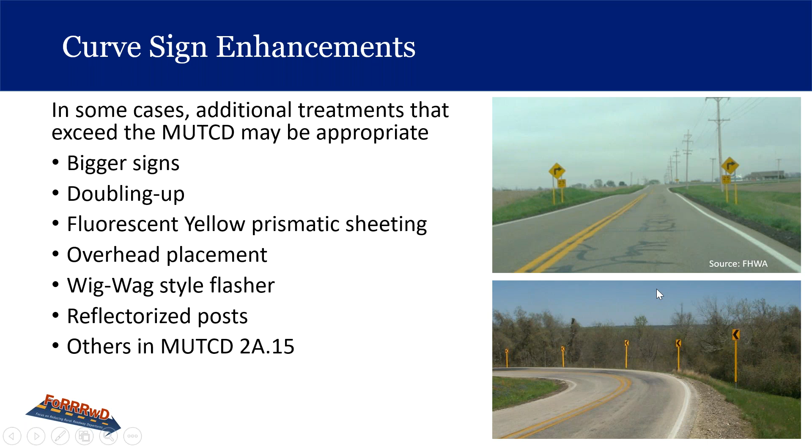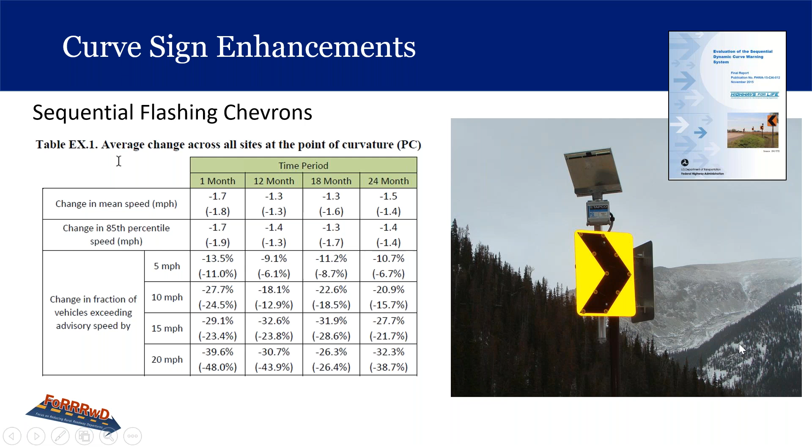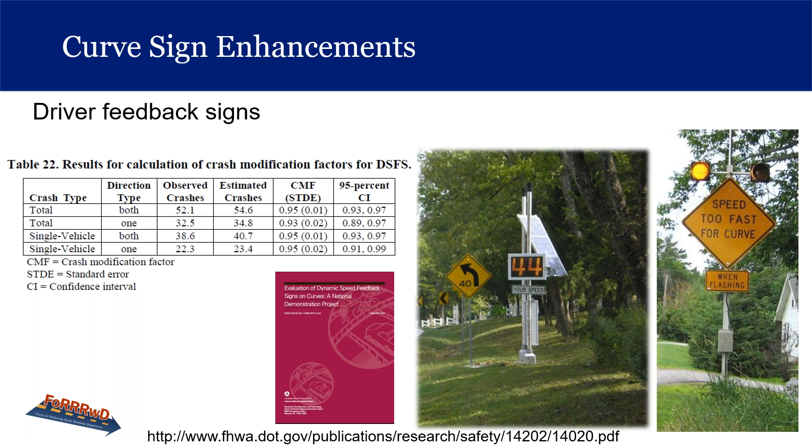Our traffic control devices should show the same color day or night. Retroreflectivity is the property of the device to reflect light from the headlamps back to the driver at night, usually using beads or prisms to reflect the light and color.

So there are some minimum retroreflectivity requirements that agencies are required to have a method in place to evaluate their signs' retroreflectivities. One is a visual nighttime inspection method, and there are 3 approved procedures for signs. These are all nighttime inspection procedures.

Then there's the measurement method. This could be done any time of day. They have a retroreflectometer that you can use to do that. We're actually getting some retroreflectometers here at the Ohio LTAP Center, and we'll be able to loan those out to different agencies, so you can request to borrow those very soon.

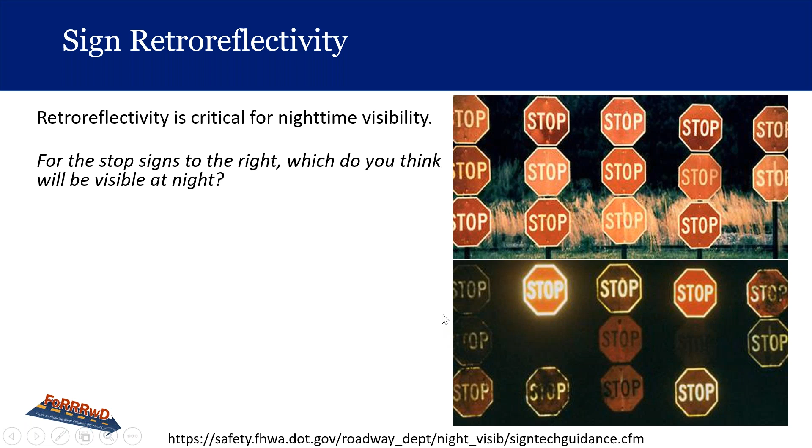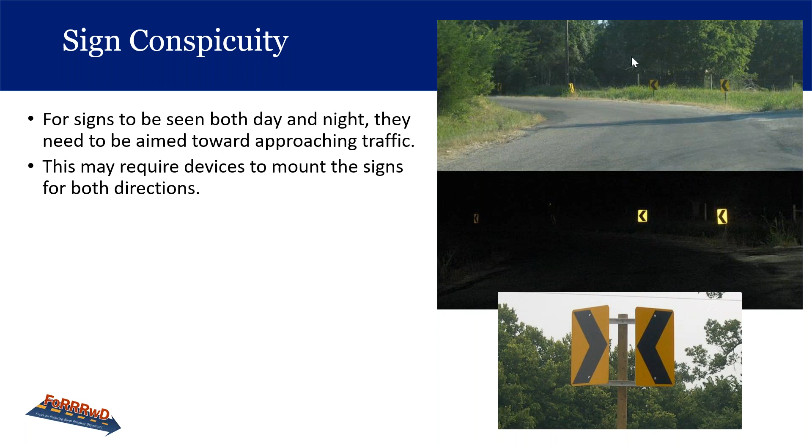In addition, vegetation and other obstructions to the signs should be removed. So this is definitely the time of year for agencies to be out there taking part in their vegetation management program. I know every April here at Ohio LTAP, we have a vegetation management conference, and it allows the workers from local agencies to get their certifications in different chemical spraying and things like that to help with their vegetation management.

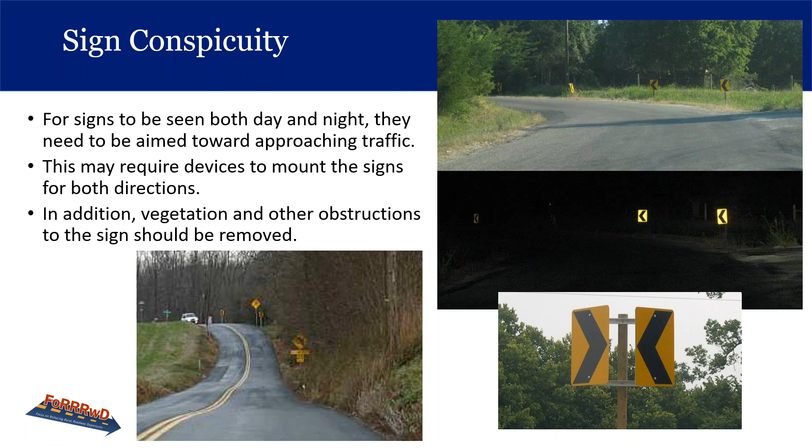But yeah, we definitely don't want to have vegetation growing over the signs. And so this is the time of year that we need to be out there taking care of that. So that was what we have to talk about there about signs.

And then our next countermeasure that we want to discuss is pavement markings. A lot of this information you'll find in part 3 of the OMUTCD. We'll also talk about not just what's in there, but some other things that go above and beyond what's in part 3 of the manual. So the different crash types addressed by pavement markings are curve crashes, head-on collisions, and nighttime crashes. The different pavement markings might include edgeline and centerline markings, delineators, or raised pavement markers.

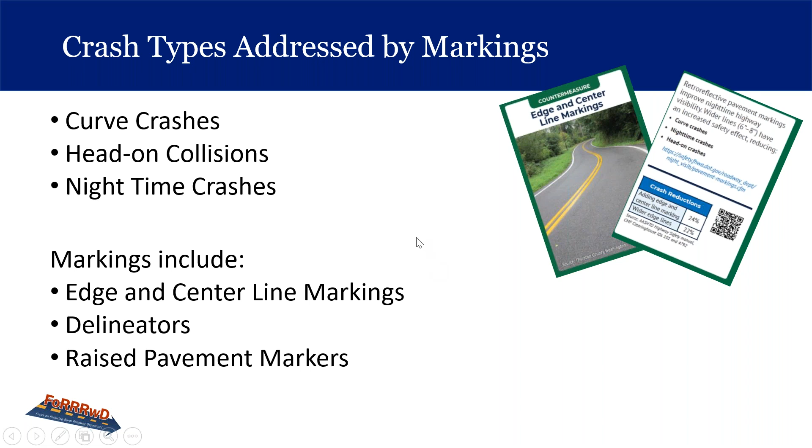So let's first talk about our centerlines and edge lines. The MUTCD talks about different requirements and recommendations for centerline markings. It states that centerlines should be placed on all rural arterials and collectors with a traveled way greater than or equal to 18 feet wide and an ADT of greater than or equal to 3,000 vehicles per day. So that's the should condition.

And then for edge line markings, the MUTCD says that these shall be placed on rural arterials with a traveled way greater than or equal to 20 feet wide and an ADT greater than or equal to 6,000 vehicles per day. The markings should be placed on rural arterials with a traveled way greater than or equal to 20 feet wide and an ADT greater than or equal to 3,000 vehicles per day. So there's a difference between standards and guidance — that's the shall and the should conditions.

As you can see in the picture, it really does make a difference to the motorists as they approach a curve and drive through a curve. They can picture and estimate how they need to drive through that curve from a distance, and then when they get to the curve, the pavement markings provide them guidance from beginning of curvature to end of curvature, all the way through the curve.

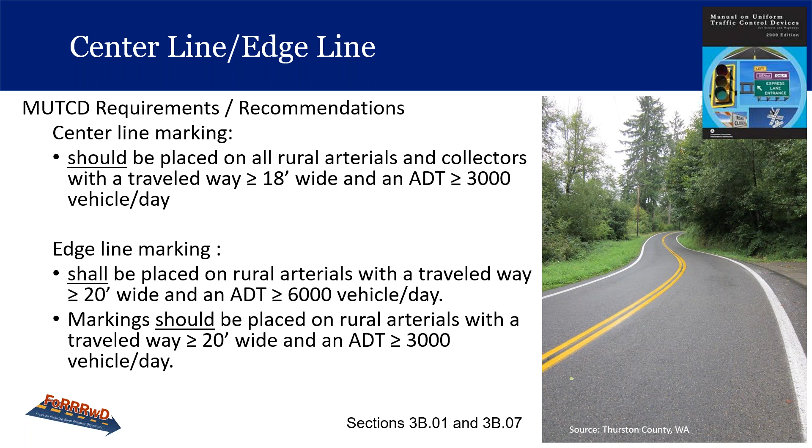So like I said, we're talking about low cost treatments. Pavement markings definitely fit the bill for that.

I've noticed even the road that I grew up on all my life down in Pike County never saw pavement markings until this past year. Maybe it was the gas tax or whatever, but the Pike County engineer finally decided to put pavement markings on that road. So I can't wait to see any crash data from before and after with that, because it's definitely a curvy road.

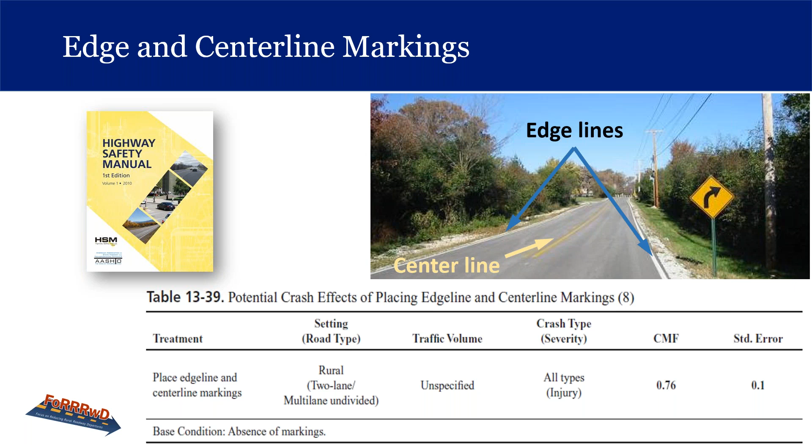Out in Missouri, they did an edge line case study, and a little background on it. Prior to 2008, Missouri DOT did not stripe edge lines on roads with less than 1,000 vehicles per day. They had approximately 18,000 centerline miles of road with an ADT of less than 1,000 vehicles per day. Of these, approximately 7,500 centerline miles, 1/3 of the mileage, had an ADT between 400 to 1,000. These roads had 219 fatalities and over 1,500 severe injuries in a 3-year period, and represented 2/3 of all the overall crashes in that state.

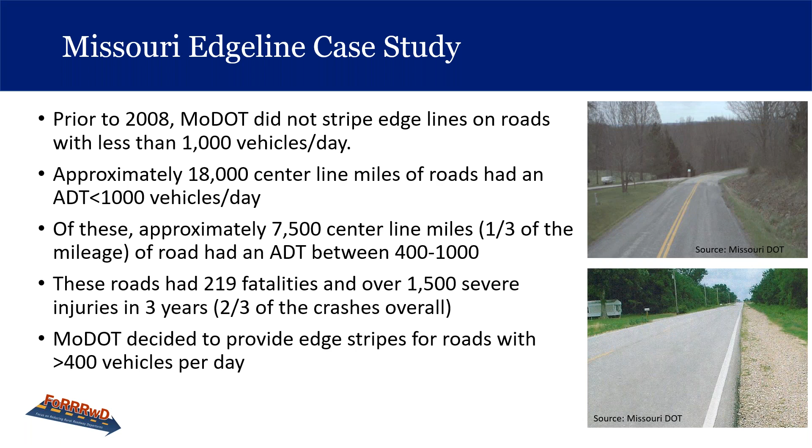Missouri DOT decided to provide edge lines for roads with greater than 400 vehicles per day to see if they could put a dent in the number of these crashes. They went through the entire study process with the Bayes method and all that stuff. They observed crashes in the before period from various counties, and observed crashes after the period, and had a percent change for effectiveness.

Another thing they did with edge lines is they enhanced them by making them wider than normal. The normal edge line is 4 inches wide. What if we made it wider by 2 inches? So they made it 6 inches wide and studied this countermeasure.

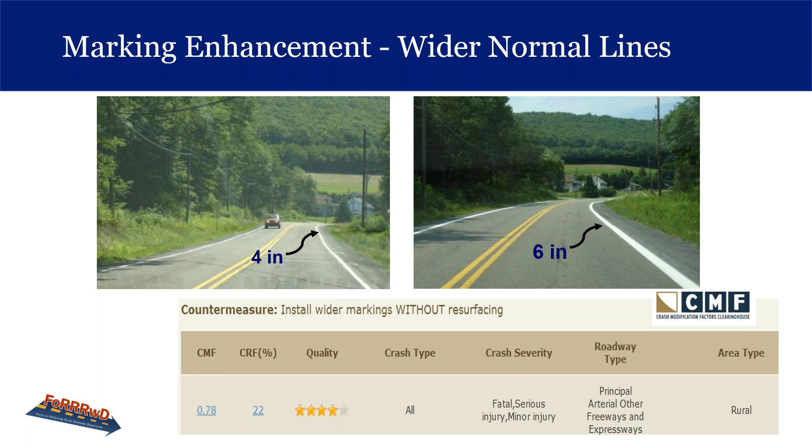Another pavement marking enhancement we have is raised pavement markers. It seems like we don't see much of these anymore because everyone says that the snow plows rip them out of the pavement. But let's see what we have here.

It says raised pavement markers may supplement or substitute for edge lines and/or center lines, reflective or non-reflective. They developed a recessed pavement marker to address the snow plow problem, so you can recess them. It says they had a maintenance thing on there, let's see what it said about the maintenance.

Some agencies use non-reflective for lane lines, the button variations shown in the photo. The button type down at the bottom are likely non-reflective due to the shape, they're circular. The raised pavement markers are historically difficult to maintain.

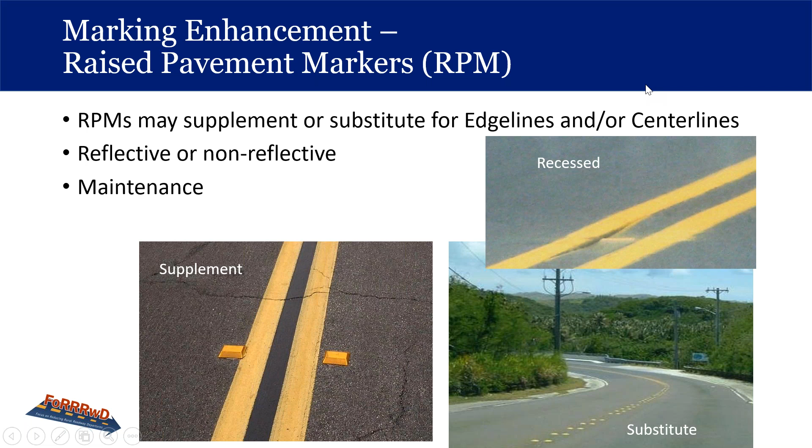So we've learned a lot of lessons with raised pavement markers, but we do know their benefit for helping to guide motorists along the roadway. One of the things they've looked at is the recessed pavement markers to address the problem with the snowplows knocking them out of the road and knocking them loose, and how they could fly up and damage cars. Hopefully the recessed pavement markers will be more successful, so we can use them more often.

Okay, our next countermeasure is delineators. Delineators provide guidance at night and during adverse weather, and they remain visible when the roadway is wet or snow covered. Here we have some post-mounted delineators, and then you can see another product type here on the right. It looks like a circular post with a bigger target, more retroreflectivity. The entire post lights up on the right.

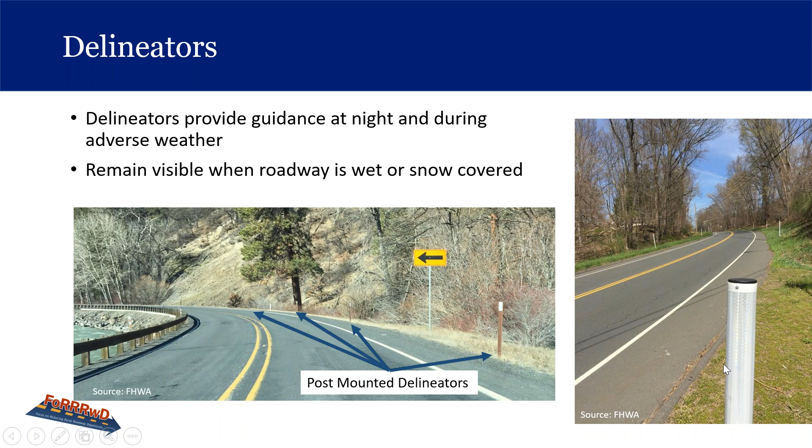These may be appropriate where table 2C-5, which we went over last week, indicates that chevrons are either recommended or optional. For all other roadways, delineators may be appropriate based on risk or crash history. You can see MUTCD 3F.02 to .04.

Here's a page from the MUTCD showing an example of delineator placement, for color, size, height, and offset. So if you ever wondered why you see delineators along the side of the road versus chevrons, it would be from this part of the MUTCD section, part 3, where you would find this material.

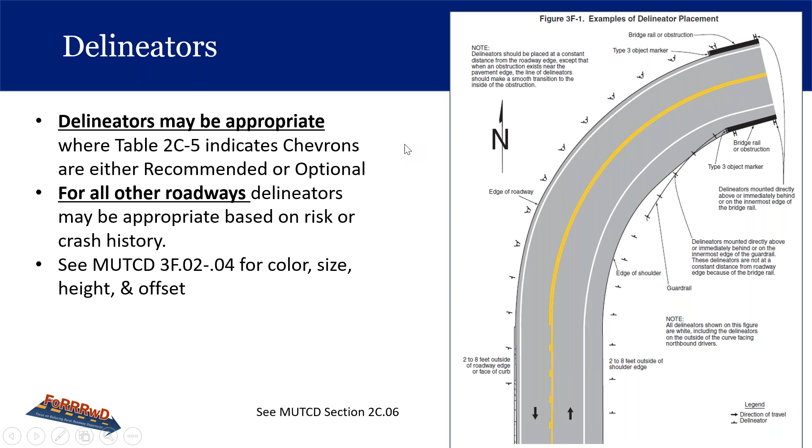And then we have guardrail delineators. The MUTCD allows mounting of these delineators on guardrail, even though it is less than 4 feet above the edge of pavement and may be a greater distance from the roadway. The MUTCD allows delineators to be placed as an option directly on the face or top of a barrier, even though height and offset may not match installation guidance. As a note, the butterfly type delineators mounted inside the guardrail are not advised for installation under a post bolt head, as it may adversely affect the performance of the guardrail.

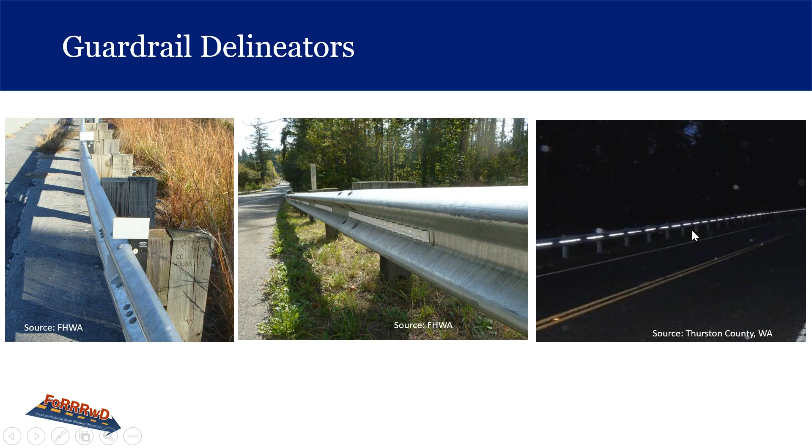Another thing to talk about is marking retroreflectivity. In the MUTCD, section 3A.02, it states it's a standard that markings that must be visible at night shall be retroreflective unless ambient illumination assures that the markings are adequately visible. All markings on interstate highways shall be retroreflective. It then goes on to say that maintaining minimum pavement marking retroreflectivity is reserved for a future text, as the FHWA is having a rulemaking on it.

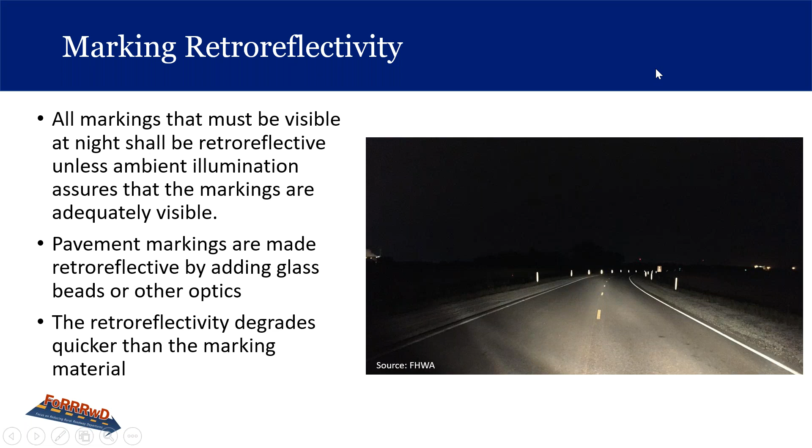There's actually a website, safety.fhwa.dot.gov, where you go to the roadway department, night visibility, pavement markings, for more information. Pavement markings are made retroreflective by adding glass beads or other optics. The retroreflectivity degrades quicker than the marking material, so there's definitely some maintenance involved, but it does provide good guidance at nighttime. It's an important feature to have with our pavement markings.

Another type of pavement marking is where we have words on the pavement. As you can see in the picture, they actually wrote the word 'curve,' and at the bottom you see the advisory speed put on the pavement as well. The goal of this type of marking is to reduce speeds in horizontal curves. They have different methods, showing good examples of what to do, and then showing what not to do, and what they prefer instead.

The source of this information is NCHRP Report 600, Human Factors Guidelines for Road Systems. You can just Google that and download the report. It's a free report.

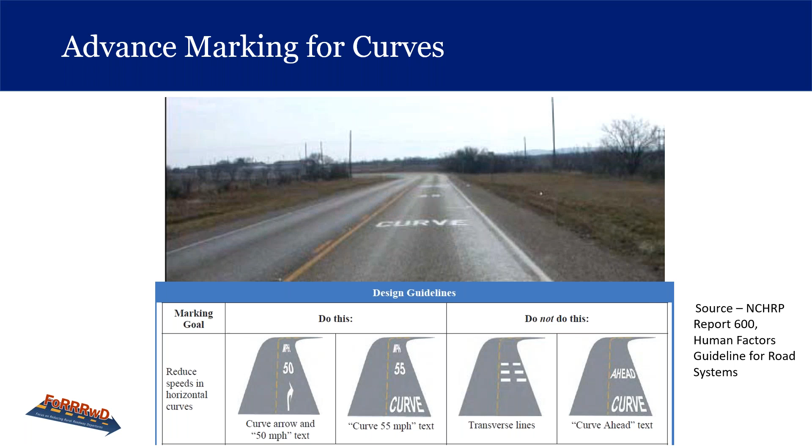Some other products we have for pavement markings, and we've actually used this quite a bit here in Ohio, are speed reduction markings. These give drivers the illusion that they're traveling faster than they really are. It involves tick marks along the inside and outside edge of the lane throughout the curve, spaced differently. As shown in the bottom picture, the spacing of these tick marks gets closer together as they approach the beginning of curvature. The theory is if the motorist feels like they're going too fast, they'll slow down.

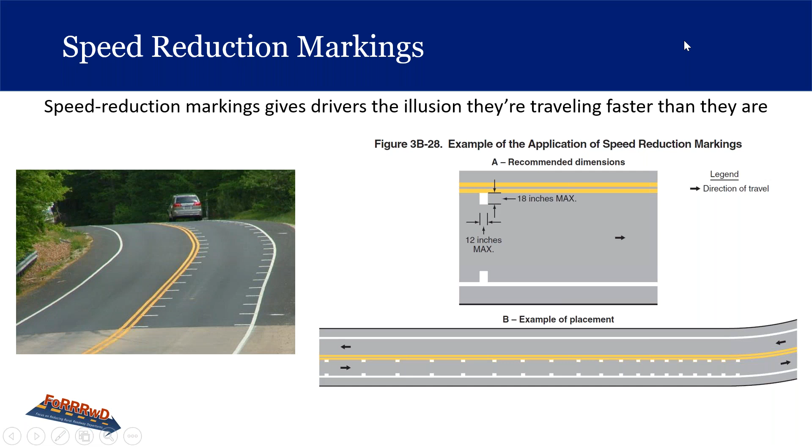Here are some good resources that the FHWA has on their website: the enhanced delineation for horizontal curves website, and also the low-cost treatments for horizontal curve safety, which came out in 2016. I recommend both of these websites and the information in them. You can download this booklet and look at it for free.

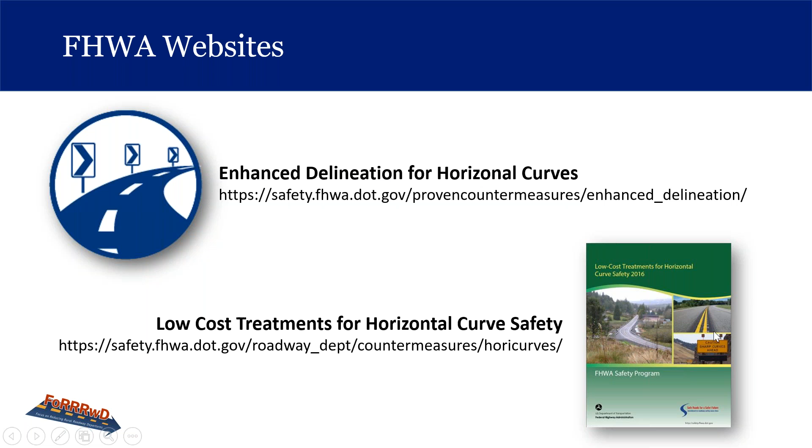Okay, so let's see if we achieved our learning outcomes for signing and pavement markings here. Let's see if you can answer these — you can write them in the chat box. It says identify signing and marking countermeasures to reduce roadway departures. Which countermeasures did we discuss to reduce roadway departures that involved signing and marking?

You can help me out here, Paula. Sorry, I'm here. Okay, there are... I asked it.

It's only one response: reflective signing and striping. Give him a few more seconds here. Okay, there's the chat box. There you go, Ray, they're coming in now.

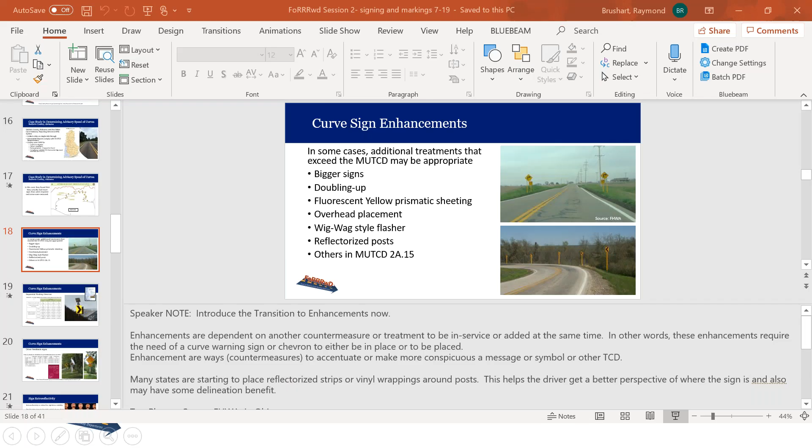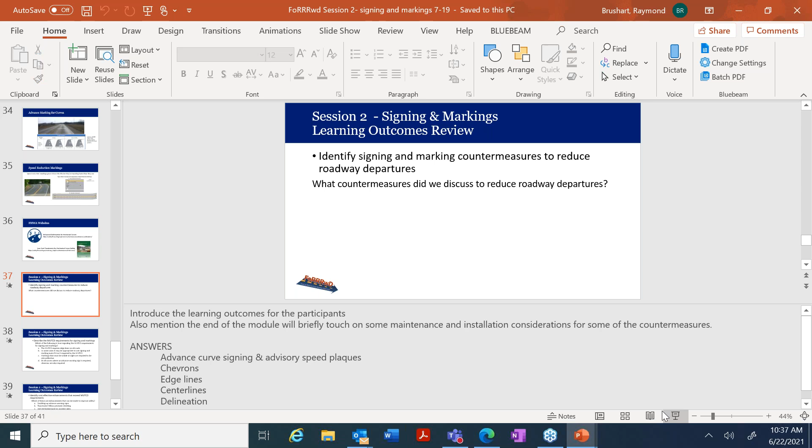All right, very good. Let me bring this back up here. Okay, so very good answers. We definitely went over advance curve signing and advisory speed plaques, chevrons, edge lines, center lines, delineation, and those were good answers. I'm glad there's people out there listening to me ramble on.

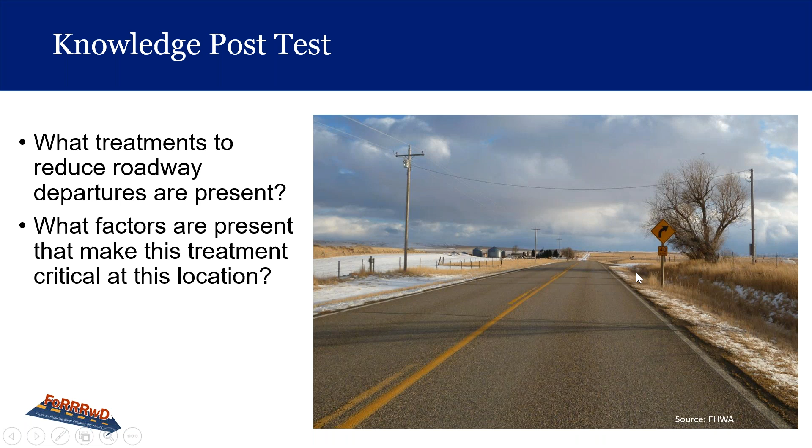Something that's not present that may - let's see, chevrons are not present. Maybe they're required, maybe they're not. So what makes the advanced warning sign particularly critical at this location? It's because the utility poles and secondary road may give the appearance that the road is going straight. That's the visual trap. A slight crest vertical curve restricts the sight distance, so you don't see the curve. So you don't even see the road going to the right. So it's pretty critical there to have that sign.

That picture was taken in Montana, by the way, not in Pike County that you may have suspected.

Okay, so any questions so far as we wrap up Module 2? Okay, Ray, I don't see any questions in the questions box. All right. Well, then I vote that we go on into Module 3. How's that?

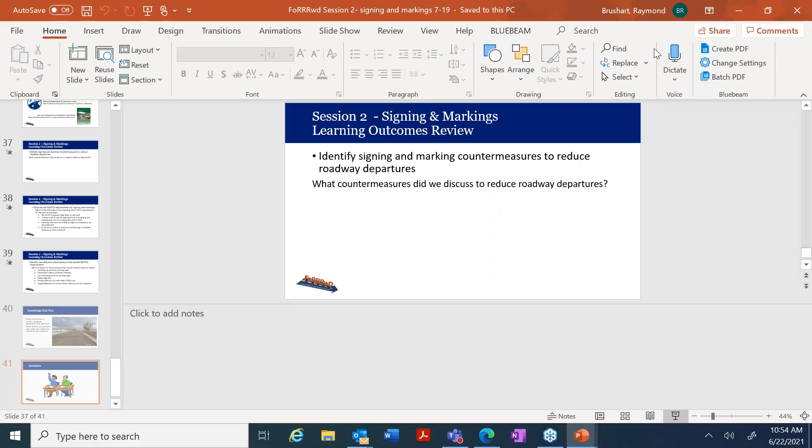All right, so in session 3, we're going to continue talking about our number one strategy of reducing roadway departures, and that is to do what we can to keep vehicles on the road. We're going to talk about pavement friction and what it can do for us.

So our learning outcome in this session on pavement friction would be to identify locations with increased friction demand and name the unique components of the high friction surface treatment, which is the HFST countermeasure, and to recognize the crash reduction potential for high friction surface treatments.

Since we learned about these, I don't know, 5, 6, or 7 years ago that I first heard about them, we've been using them quite often, and they really do have an impact on reducing crashes in locations that need more friction.

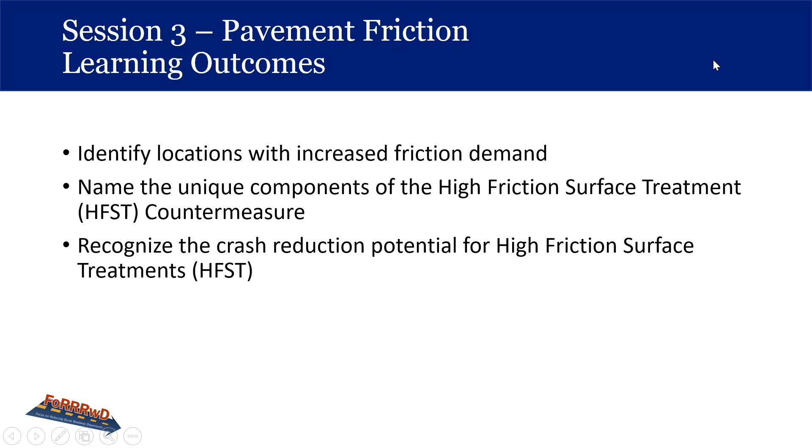With our knowledge pretest, first of all, there is a website on FHWA's roadway departure website, rspcb.safety.fhwa.dot.gov, with a lot of information about roadway friction treatments.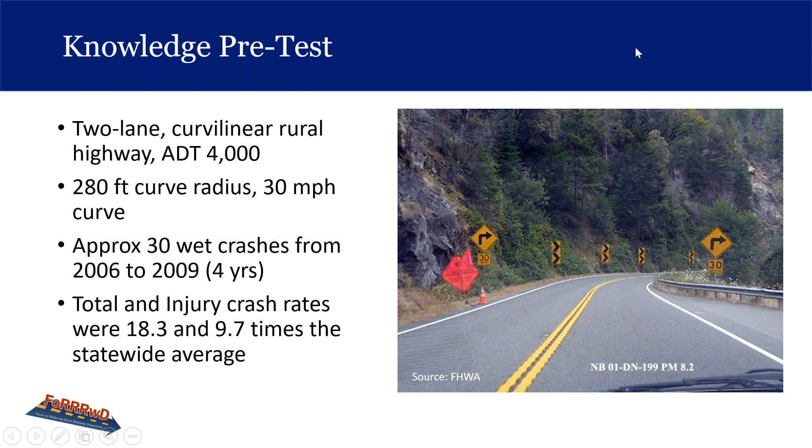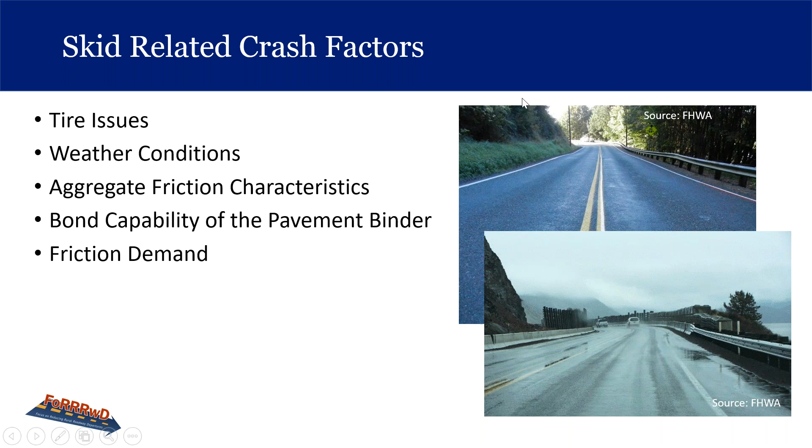Let's look at some skid-related crash factors. What causes skid-related crashes? Could be tire issues - bald tires certainly don't help. Weather conditions, so rainy, wet or icy conditions. Aggregate friction characteristics - the aggregate in the asphalt could get rounded and not provide the proper amount of friction. The bond capability of the pavement binder, so you're losing aggregate from the binder, and the roadway itself might have a high friction demand. So those are skid-related crash factors.

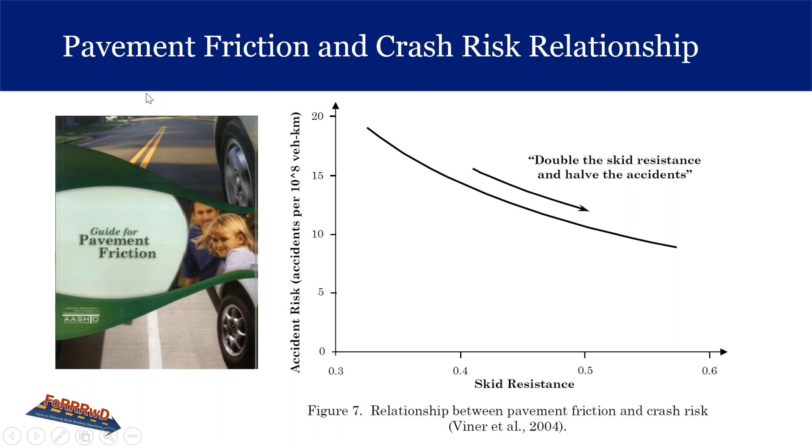Here's another resource for you to find more information from AASHTO. They have a guide for pavement friction, and this is actually a pretty costly book. But this one here that I just clicked on is free - it's a web-only document with all the same information. It's the NCHRP web-only document 108, Guide for Pavement Friction. You can just Google that and view it or download it. This web-only document 108 is the source material for the AASHTO guide for pavement friction.

On page 78 of the NCHRP guide, which is the chart I'm showing you on the right, it shows the following from the state of Maryland: sites without any geometrical constraints are categorized as low frictional demand sites, while sites with geometrical constraints such as railroad crossings, traffic lights, pedestrian crossings, roundabouts, stop and yield controlled intersections, curves, and freeway entrance/exit ramps are categorized as high frictional demand sites.

So here we have the chart showing skid resistance on the x-axis and accident risk, accidents per 10 to the 8th vehicle kilometers. The more skid resistance you have, the less risk you have. There you go, the relationship between pavement friction and crash risk.

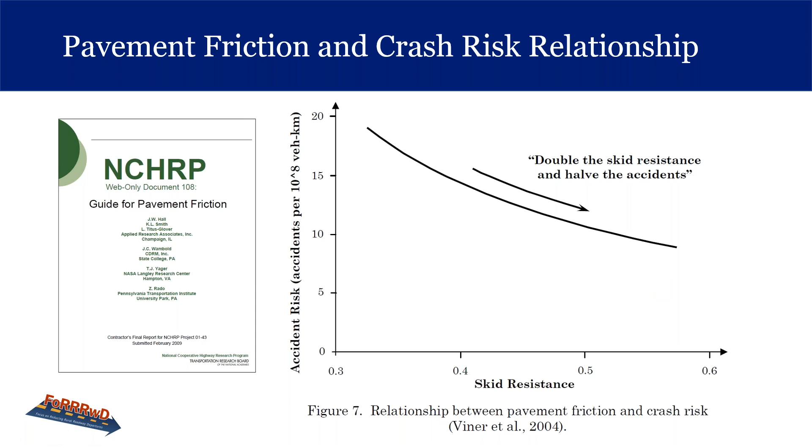If you're wondering why every time you see a nice exit ramp just got resurfaced, and then a couple weeks later ODOT came in and roughed up the pavement, it was because we came out there to do some diamond grinding and provide more friction. We discovered that when an 18-wheeler turns over on its side at these locations, almost every time it actually went into a skid first and then flipped over. So the theory is, let's prevent the skid, therefore preventing the rollover.

Okay, so... you see what I was going to say there. Okay, so let's go back to that picture here.

So friction demand is compiled by a number of variables. You've got a road with tight curves or curves on a downhill grade like the one you see here. It's a downhill grade plus there's an intersection, so that's like the double whammy, especially if people are traveling faster than they should be or not paying attention.

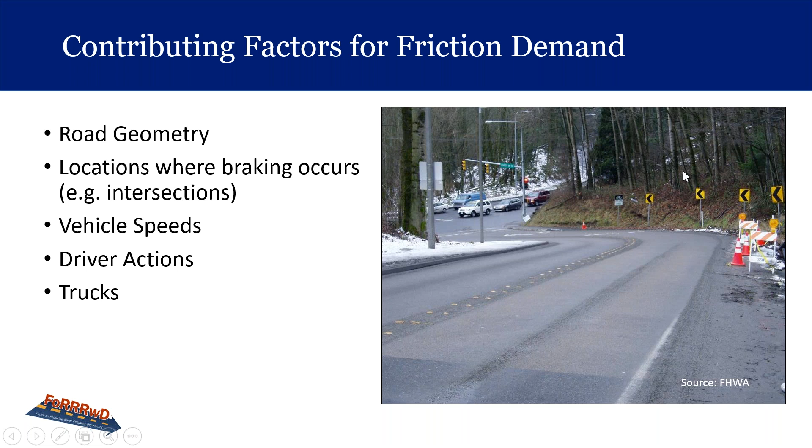Okay, so here we have the AASHTO horizontal curve design model. For all you people that love physics and math, we have a formula on the screen. The radius of the curve is equal to the design speed squared divided by 15 times the super elevation and side friction factors added up. This is from the AASHTO Green Book. I'm sure all my ODOT engineers had that one memorized.

But the key message here is to introduce the AASHTO horizontal curve design model and the different factors involved. When a vehicle moves in a circular path, like in a curve, it undergoes centripetal acceleration toward the center of curvature, although drivers feel it as a force pushing them outward. From accumulated research and experience, limiting values for super elevation and friction have been established for curve design.

There are some assumptions in this AASHTO design model: the passenger car tracks the curve as a point mass, and operates at a design speed all the way through the curve. The curve design should avoid loss of control due to skidding during cornering. The model is intended to produce operations that avoid loss of control due to skidding, which would occur if the side friction demand exceeded the friction provided by the tire and pavement surface.

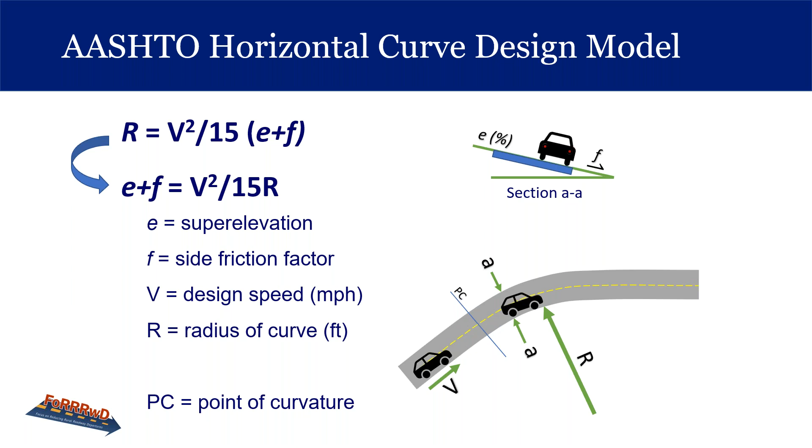And so that should explain why friction is so important. If we rearrange the formula and put super elevation and friction on the left, we can demonstrate the importance of friction, especially since there's no super elevation. All right, so that's our little background on that.

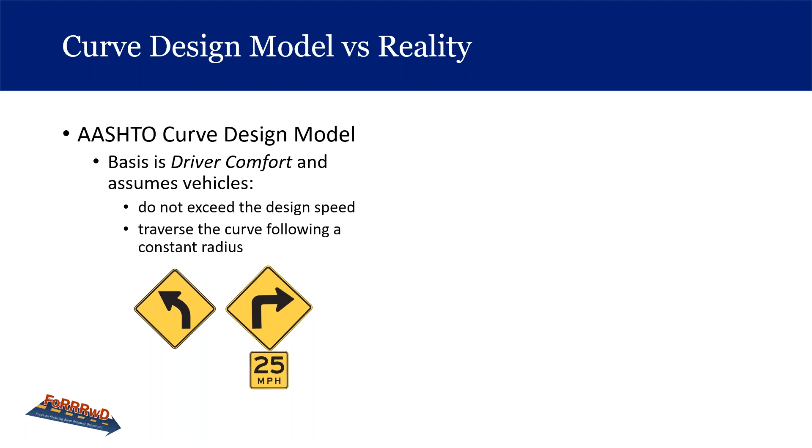And then we have our curve design model versus reality. This curve model I just showed you is based on driver comfort, and assumes vehicles do not exceed the design speed of the curve and that it traverses the curve following a constant radius. But in reality, the likelihood of skidding increases when these assumptions are violated, and several studies have shown that under real world conditions, both of these assumptions are violated.

Okay, so in the MUTCD, if you studied that a little bit, you'd see that the advisory speed may be the 85th percentile speed of free-flowing traffic. And then when we did our ball bank study that we talked about last week, the speed corresponding to a 16-degree ball bank indicator reading, or speed otherwise determined by an engineering study. So these are the speeds that we deal with when we study a curve.

A lot of times these assumptions are violated as cars drive through these curves. They're either driving too fast or they're not staying in their lane, which they're supposed to do. We also talked about last week how a big percentage of head-on crashes happen in curves. That proves that people are not staying in their lane. They're not traversing the curve following a constant radius, in other words.

So if you want more information on this, NCHRP Report 500, Volume 7, deals with a guide for reducing collisions on horizontal curves. So they even talk about friction in that booklet as well.

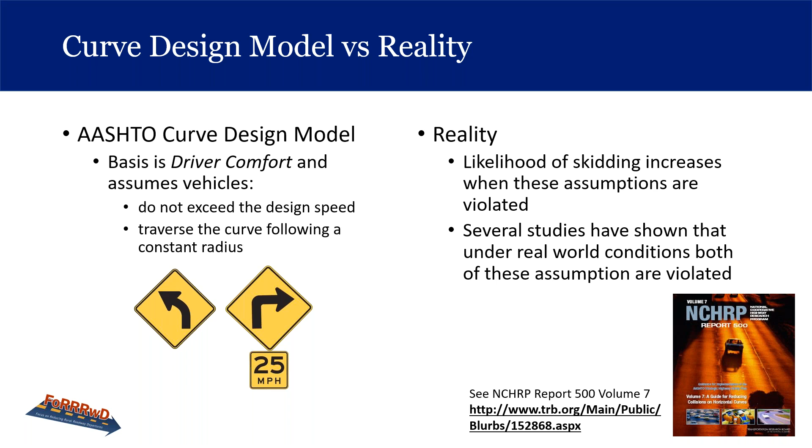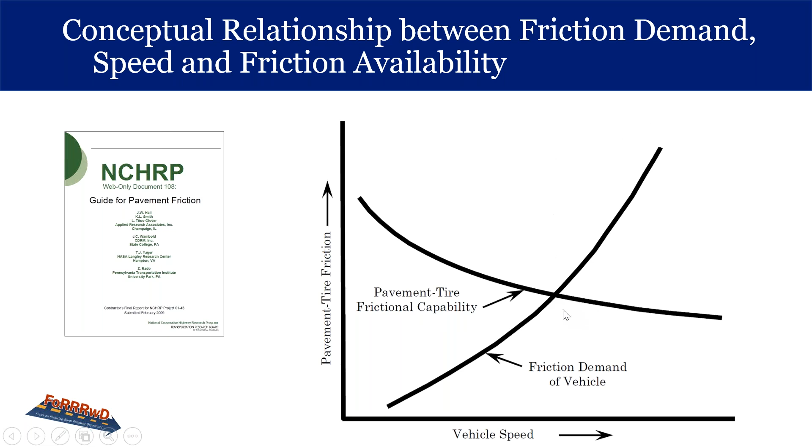Basically, it's not a good thing when your car is driving through the curve and the friction demand exceeds the pavement tire friction capability. That's the point where the skid begins. So we need to do what we can to prevent that from happening. The speed of the impending skid is at the intersection of these two lines.

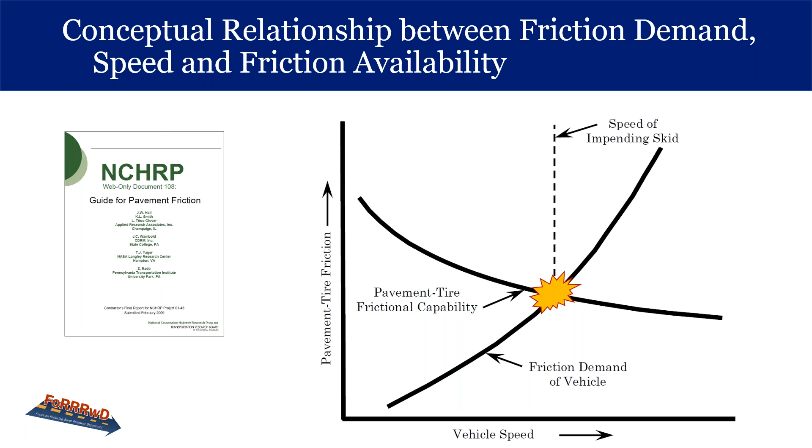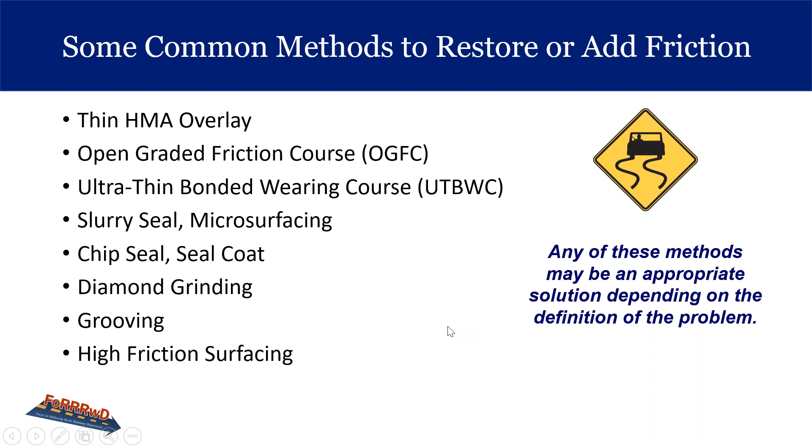So here's some common methods to restore or add friction. We have the thin hot mix asphalt overlay, or the open graded friction course, or ultra thin bonded wearing course, or a slurry seal or micro surfacing, or a chip seal and seal coat, and then the diamond grinding that you see on our interstates and interstate lookalikes, or grooving, and then high friction surfacing. These are all quite common these days, and any of these may be an appropriate solution depending on the definition of the problem. But we want to focus on our high friction surface treatment and how it's used as a critical spot improvement.

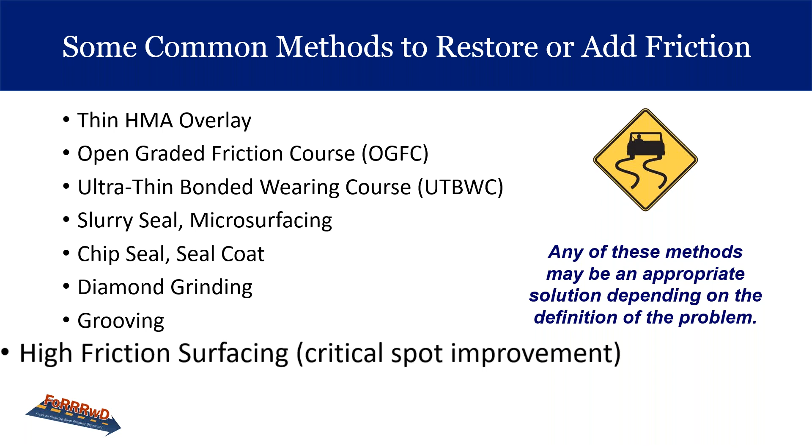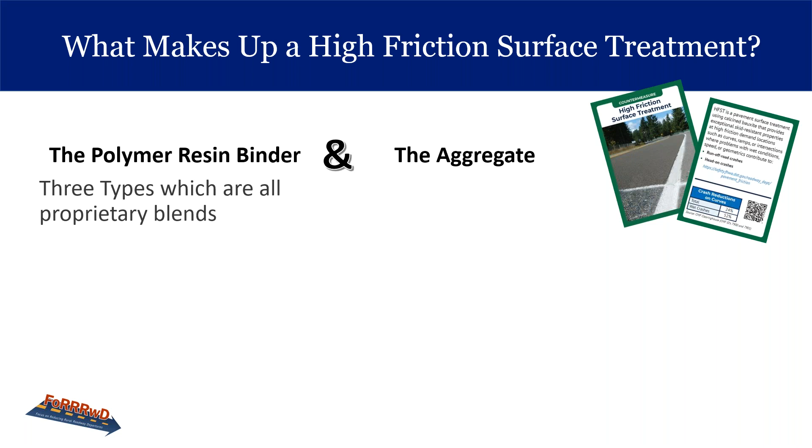So first of all, what makes up a high friction surface treatment? There's two parts to this treatment: you've got the polymer resin binder, and then the aggregate itself. There are three types of binder.

The design of the binder is evolving with many new products becoming available. The most common binder used is the epoxy resin, but many of the others work well also. You may have some drawbacks like cost or placement restrictions. The binder locks the aggregate in place and provides the needed tensile strength to transmit the vehicle load to the pavement below.

The aggregate we want to talk about today is called calcined bauxite, and that's because it provides the highest resistance to polishing and friction durability. Bauxite is available from Arkansas and is now being calcined in Alabama, so there's a local U.S. source for the aggregate rather than getting the rock from India or China. When they first came out with bauxite, it was very costly, but in the last 3 or 4 years, the cost has been coming down because we can get it locally, or in the U.S. at least now.

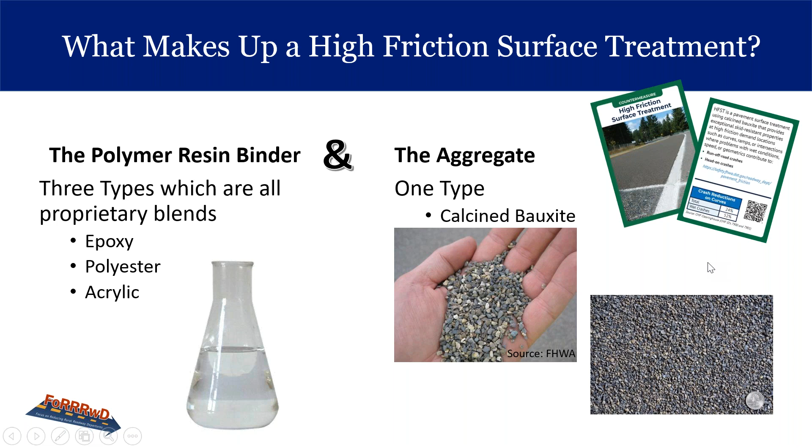So why do we use the high friction surface treatment? Well, with the bauxite, it resists polishing when compared to other aggregates, and the high quality binders improve aggregate retention. It's the combination of the bauxite resisting the polishing to become rounded, combined with the high quality binder so that the aggregate actually stays on the roadway longer.

Placement of this treatment in the curves receives the shear and tensile forces not found in tangents, which can accelerate polishing when excessive friction demand occurs. Quality polymer binders placed properly are required to retain the aggregate. Aggregate loss can result in lower friction values over time. Aggregate needs to be embedded 50% into the polymer binder for installation longevity.

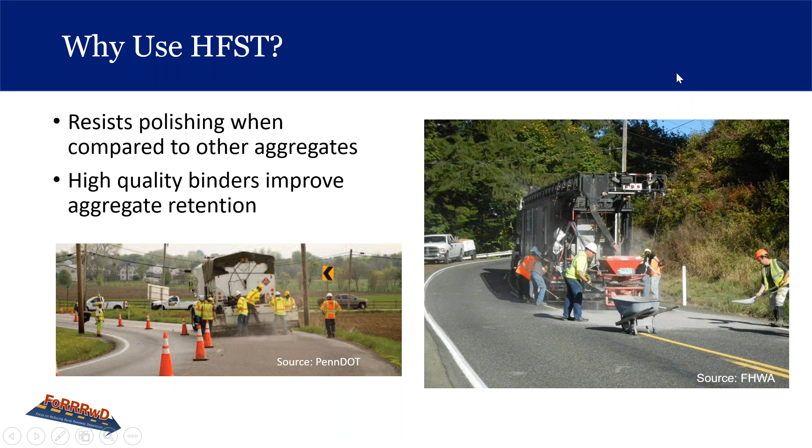Here's an example. This video shows how reductions of 25 to 30% affect the stopping distance. I don't know if you can hear this or not, but at least you can see it.

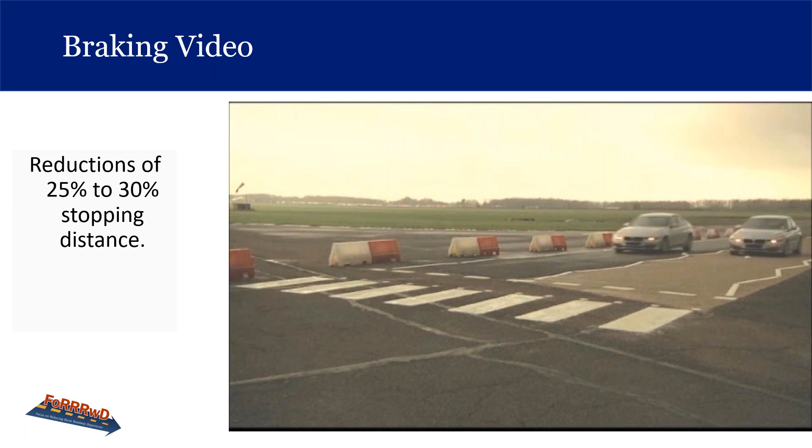Okay, so you can see that the car actually did come to a stop sooner than the non-treated lane of travel. This was done in 2013 using calcined bauxite, and on a 3-run average, the friction value on the concrete pavement was 52 before treatment. On the high friction surface treatment, the friction value was 85, and the stopping distance was between 25 to 30%, regardless of speed. You could probably talk to some people involved in crashes that wish they could have stopped 25 to 30% shorter.

So where can friction benefit safety? At high crash locations that involve wet weather related crashes, and high friction demand locations like curves or intersections — like that one picture with a curve and an intersection downhill. Or poor pavements, which have marginal friction caused by the weather, or places that have friction values not compatible with approach speeds and geometrics.

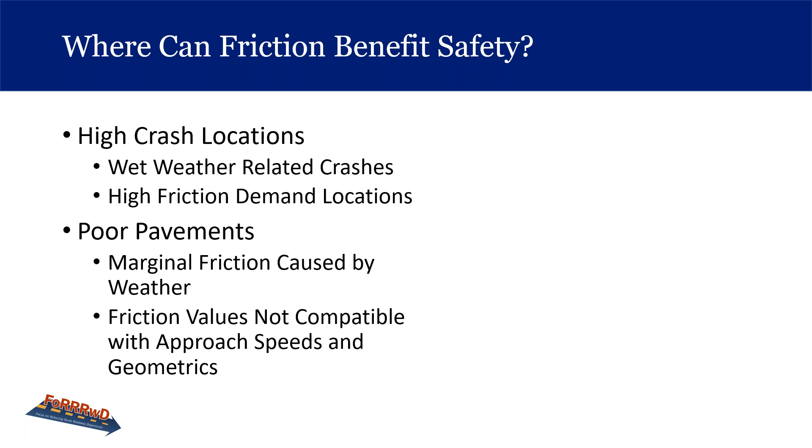So horizontal curves, when we talk about road geometry, that's definitely a place where we would get a lot of safety benefit from this high friction surface treatment.

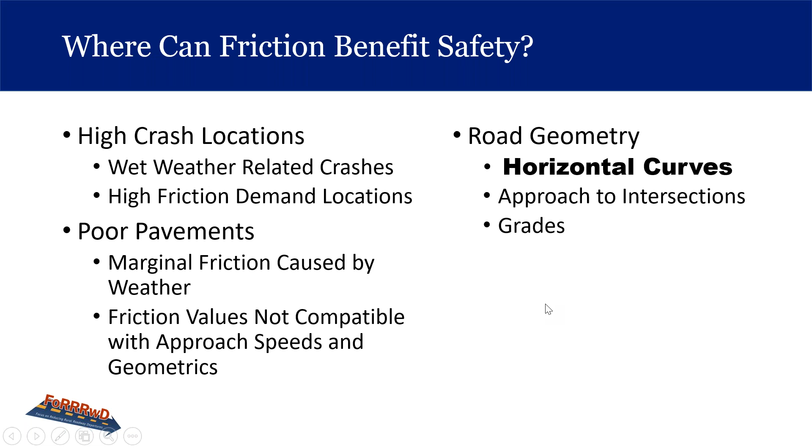They've studied this treatment and come up with recommended distances ahead of the point of curvature to begin the high friction surface treatment. So again, it's not applied to your entire roadway. When you do it for a curve, you do a certain distance ahead of the point of curvature, based on your approach speed. A lot of 2-lane rural state routes, county roads, and township roads have 55 mile per hour speeds. In that case, you look at the advisory speed for the curve. So if you have a 35 mile per hour curve on a 55 mile per hour roadway, you'd begin this treatment 194 feet ahead of the point of curvature. Or if you have a sharper curve, 30 miles per hour, that's 230 feet before the point of curvature.

This all came about from a research study done by Texas A&M University, and at the bottom they have a link so you can read up on their research results.

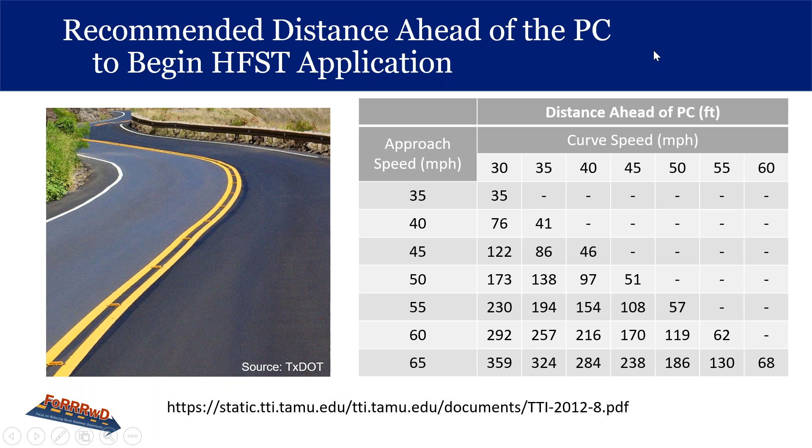Okay, I'm going to see if you can hear this, but at least you can see here's a video where they studied a problematic intersection involving a curve and an intersection where they had a lot of crashes, and you'll see what they did. They interviewed the chief of police and the PennDOT engineer, the safety engineer in charge of this. So I'll run this, see if you can hear it.

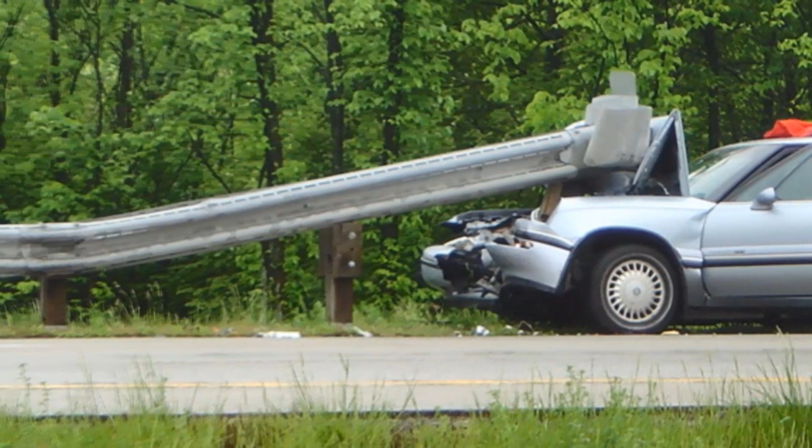We are very excited about using high friction surface treatment. We chose this particular curve because of its unique crash history — the majority of crashes were occurring in wet conditions. In fact, over a 3-year period, there were 26 crashes. Since I've been here as chief of police, this intersection has been very problematic for us. We frequently have to park a marked unit there with the emergency lights on to try to slow people down. It was not the speed the vehicles were traveling, it was the road surface being wet that contributed to the accidents. We contacted the Pennsylvania Department of Transportation, spoke with Steve Pohowski, an engineer, and we worked together to come up with some kind of solution. I've been doing low-cost safety improvements for over 10 years, and I've never seen such an immediate positive response to a safety treatment. In our use of high-friction surface treatment on curves, we've seen a day and night difference in accident reduction and even elimination. Quite simply, it stops crashes from occurring. Absolutely consider this road surface material. This eliminated our accidents. Since the material's been applied, we've had, I believe, only one reportable accident at that location. So it basically eliminated all accidents there.

So it basically eliminated all accidents there.

Okay, I like this, let me pause here so you can see. We talked about super elevation. Most 2-lane rural roads have zero super elevation, but this has negative super elevation, which contributed as well. As cars whip around this curve, they're actually going downhill through the curve at this critical point, so you can see how low friction plus negative super elevation could contribute to the sharpness of the curve.

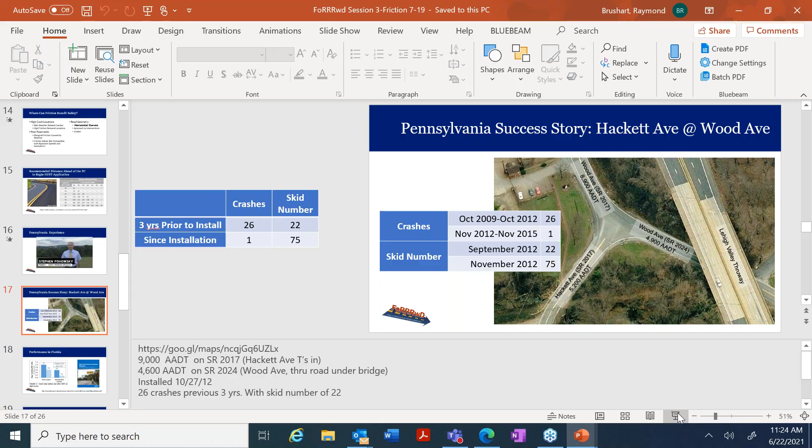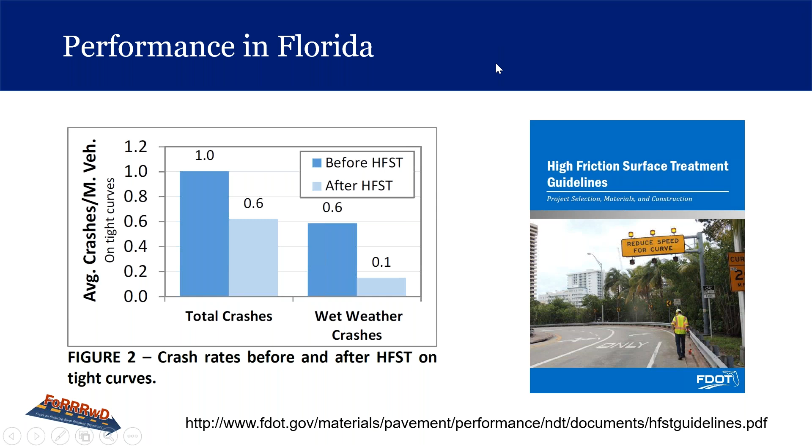The high friction surface treatment was planned and designed in less than 6 months and installed in less than 2 weeks with single lane two-way traffic control in 2012. There have been zero reported crashes through 2015 on that section of highway - over 30 wet crashes down to zero. So now you can see why the Federal Highway Administration is really imploring everyone to consider the use of high friction surface treatments, because it almost totally eliminates these types of crashes.

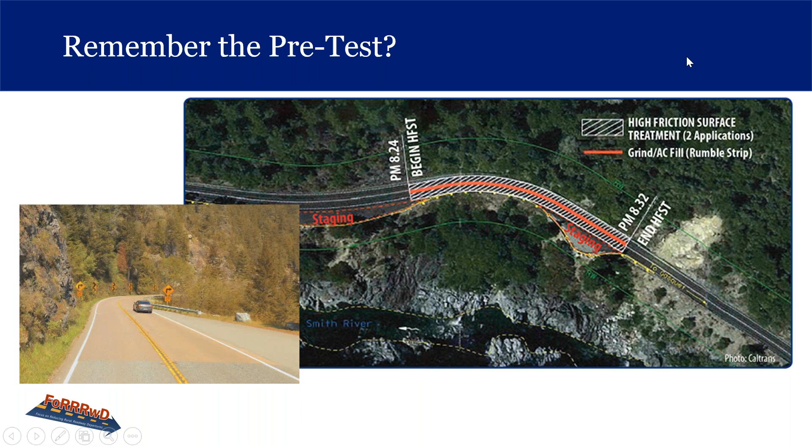The crash reductions show some pretty big percentages - 63% reduction in wet pavement crashes, 52% in an 8 state naive study versus a comparison site study. So again, drastic reductions in the number of crashes.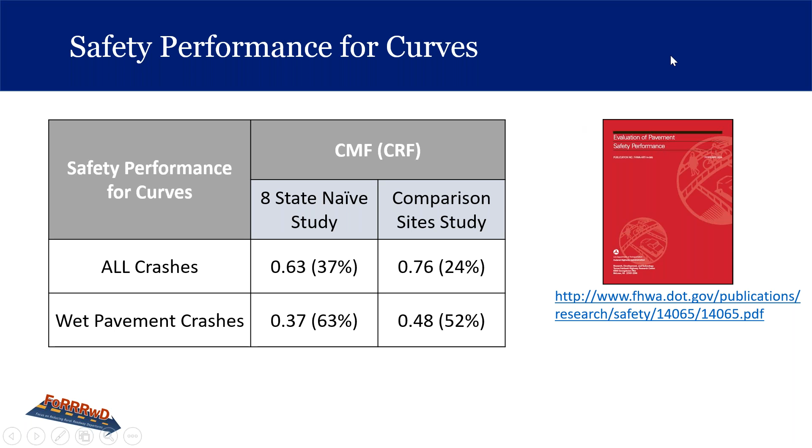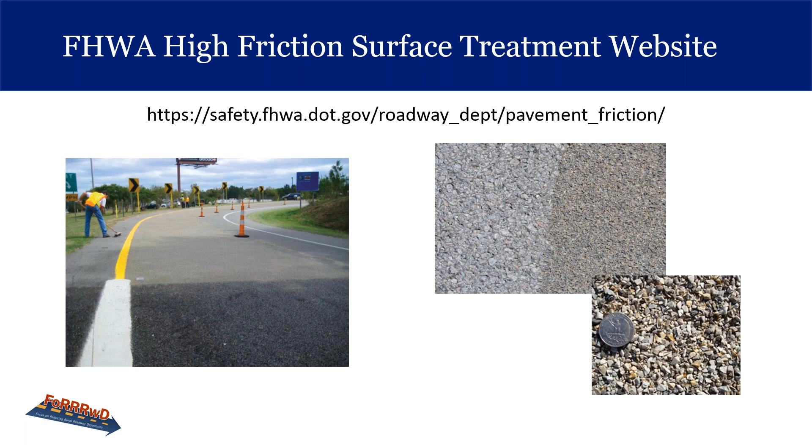Then, of course, we have another resource, the FHWA High Friction Surface Treatment website. You can see pictures showing what the bauxite treatment looks like at the bottom right, showing a quarter there to help you estimate the size of the aggregate. That's a good website to check out.

Well, let's wrap up - I'm running out of time here for today, but let's go over our learning outcomes review. It says identify locations with increased friction demand. How can high friction demand locations be identified?

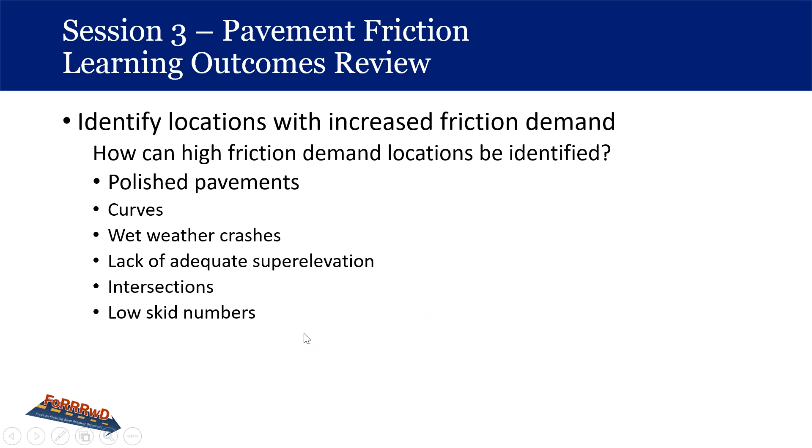In the interest of time, I'll just go over this. It's locations where you have polished pavements from high friction demand, like curves, wet weather crashes, lack of adequate super elevation - like on a lot of our 2-lane rural roads in curves - intersections, and places that have low skid numbers or low friction value numbers.

And then, name the unique components of the high friction surface treatment countermeasure. What components are used in a high friction surface treatment?

We have our calcined bauxite that is installed on the polymer resin binder.

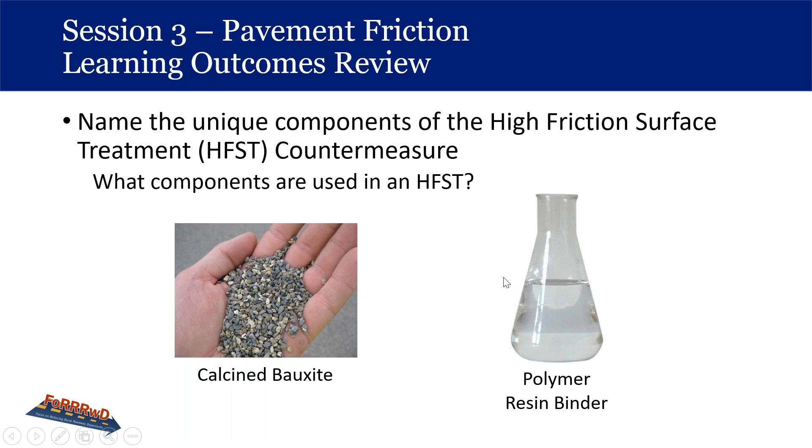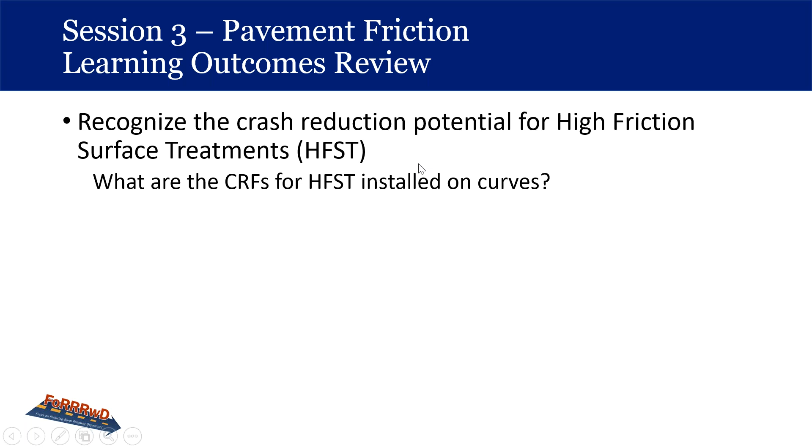Here we recognize the crash reduction potential for high friction surface treatments. What are the crash reduction factors for high friction surface treatment installed on curves? The Highway Safety Manual tells us it has crash reduction factors of 24% for total crashes and a 52% reduction for wet crashes.